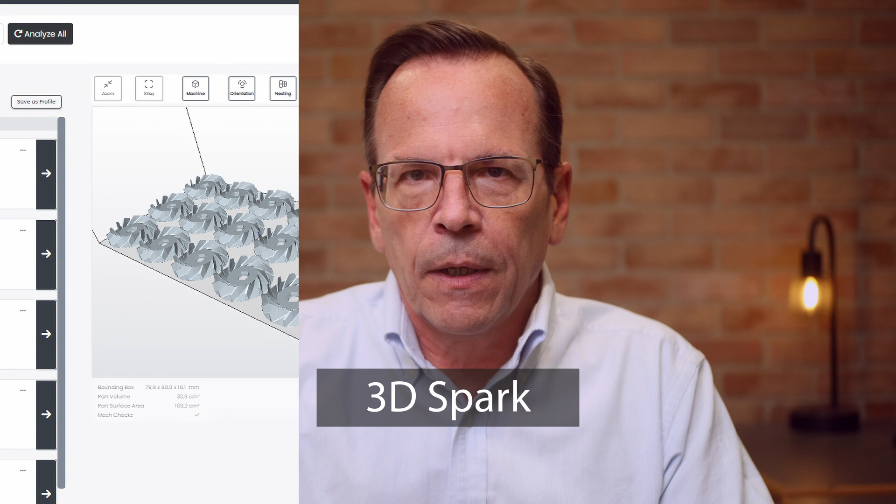In the software category, I'll start with 3D Spark. It offers a decision-making tool that assists in selecting the right process for your parts. Those decisions are based on manufacturability, part cost, time to manufacture, and that's across the full supply chain, and sustainability. What caught my attention is that this isn't just a tool for assessment of additive's applicability. It also produces recommendations for conventional parts. So there's a recommended manufacturing path for every part that's fed to the software.

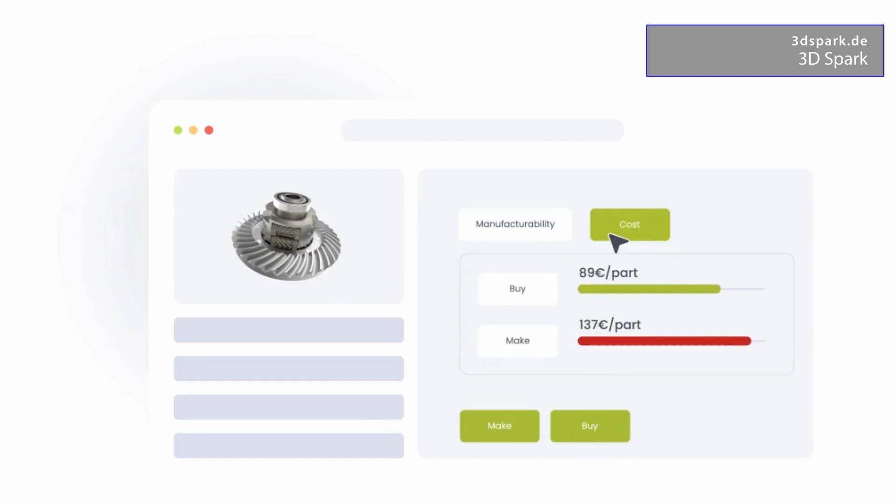Now there's two key pillars to making that happen: an advanced algorithm, and that algorithm is fueled by customer-specific parameters rather than a generic data set. During onboarding of a customer, the data set is populated with the customer's actual data for both additive and conventional processes, which the company states provides very accurate assessments, citing plus or minus 5% variance between actual and estimated part costs. 3D Spark's target markets are large OEMs and service bureaus for automated quoting.

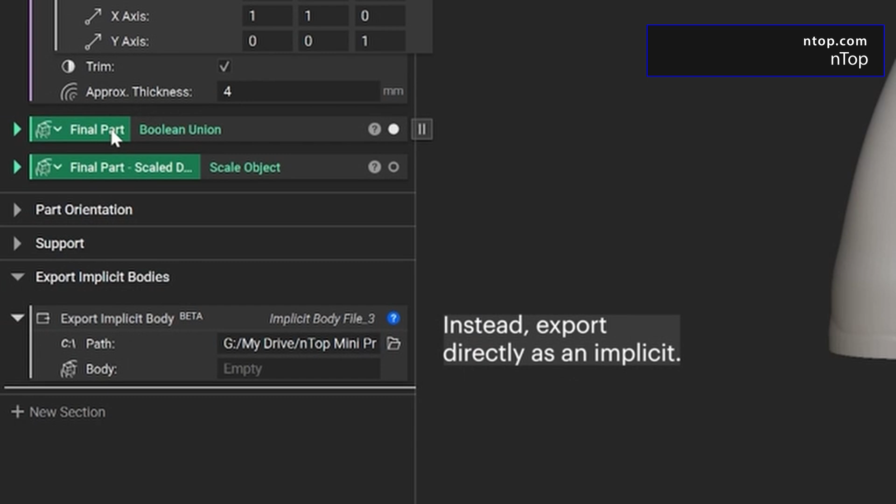nTop announced its nTop 5 software for design, generative design, and topology optimization, offering computational design technology. What's new with version 5 is an implicit modeling kernel for performance and precision combined with an expanded ecosystem within nTop's core developer library that now includes mechanical simulation, computational fluid dynamics, and build preparation tools. That expansion includes 5 new integration partners that can read and query implicit models natively in their software for more efficient end-to-end workflows. Those partners are Autodesk, Materialise, Hexagon, Intact Simulation, and Cloud Fluid.

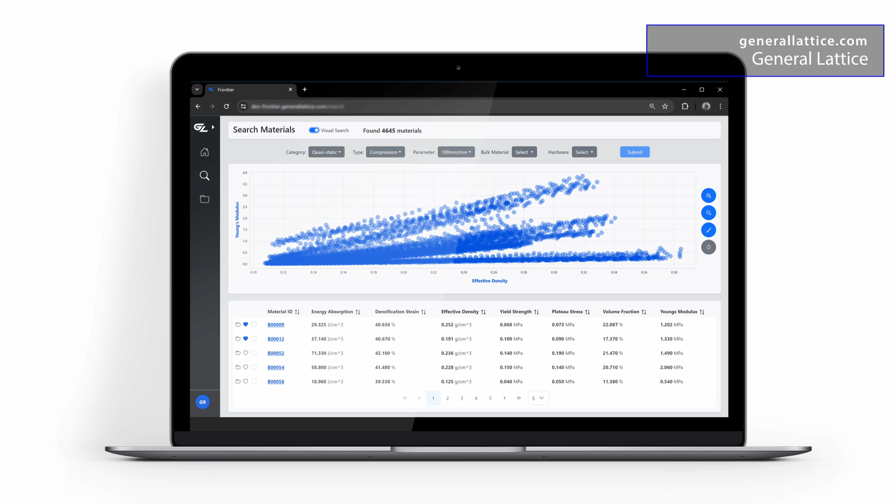Last year, General Lattice announced Frontier and its digital lattice library, which is an archive of materials plus process parameters for various lattice designs, supported by lengthy lists of the associated mechanical properties. Essentially, General Lattice does all of the testing to put you on the fast track with confidence to incorporate lattices in your design. This year, it has launched Frontier Integrations, which allows you to select and apply a desired lattice to your part.

My understanding is that the integrations are limited to those machine and material collaborators for which they have healthy data sets so they can present accurate representations. And that's from companies such as Formlabs, EOS, BASF, and Photocentric. Once the lattice is applied, you can then have it printed through its validated supply chain network. Note that I'm unsure if you can download and print it on your own machines. While robust, this web-based application is affordable, just $120 per month per user.

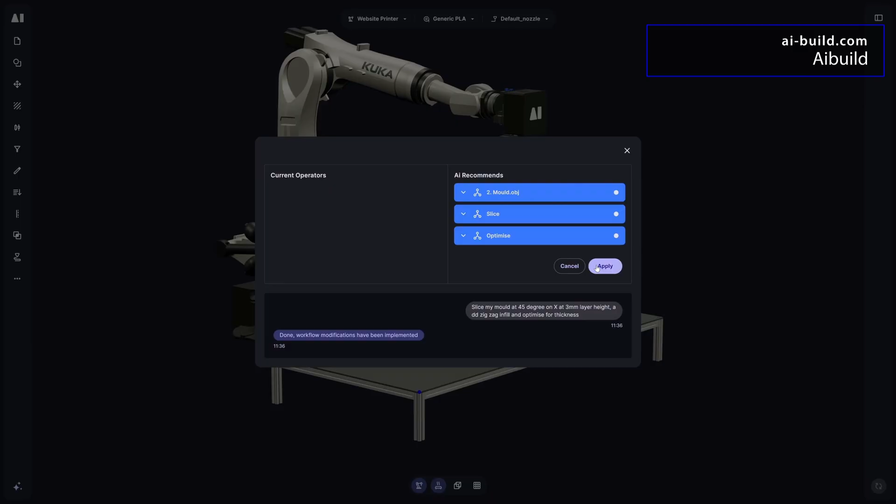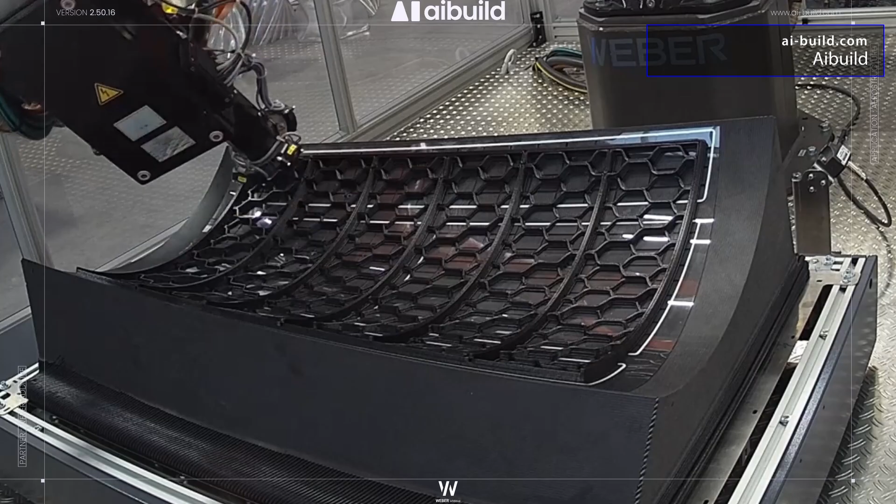Aibuild was demonstrating its new version 2.5 AI solution with an emphasis on the user interface, and it looked quite nice with seamless integration of natural language instructions and visual programming. Where it focuses is on the material extrusion solutions, either fused filament fabrication, FFF, or fused granulate fabrication, FGF, with some DED, for gantry or robot-mounted heads. Its functionality centers on toolpath generation augmented by past print defects and failure information.

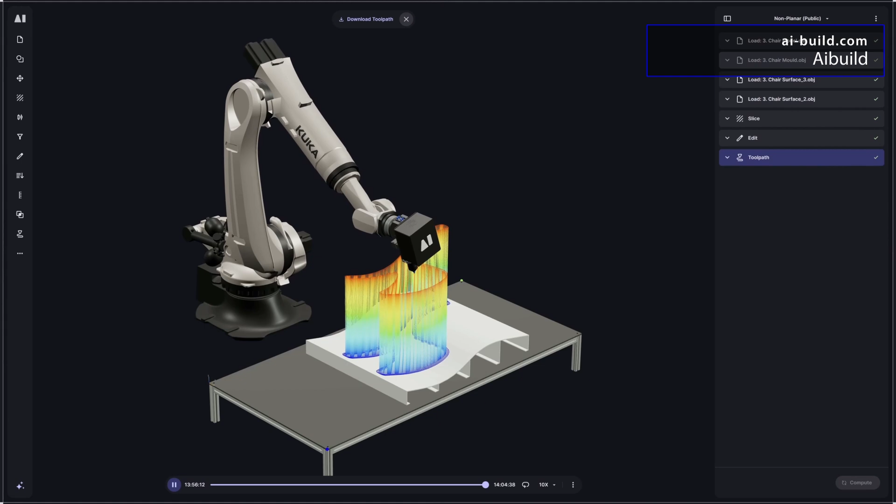The dataset upon which the AI draws is largely populated by Aibuild's partner OEMs, but your real-world results can, or will, enrich that data. While it focuses on FFF, FGF, and DED presently, the vision is to become the singular platform for all additive technologies. What I walked away with was a strong sense that Aibuild's team is comprised of straight shooters and bright minds that have the noble goal of helping the industry grow by removing the pain point of time or failure in setting up prints.

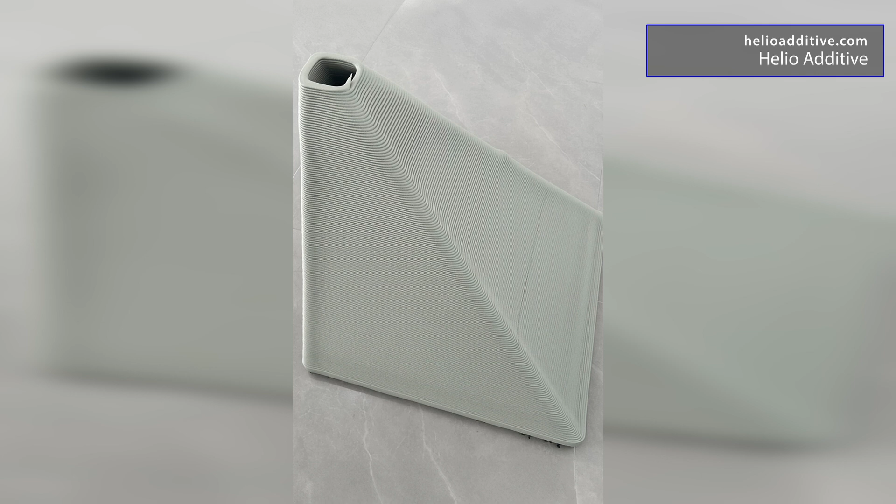In the Polymaker booth, Helio Additive debuted Dragon, which is the result of collaboration between the two companies. Like Aibuild, it is addressing the first time right challenge, but also focuses on improving print times, reducing cost, and improving mechanical properties. To do this, it uses simulation and optimization. Its approach is to analyze and simulate all parameters that are baked into the G-code. Dragon uses an understanding of the physics governing material behavior during printing.

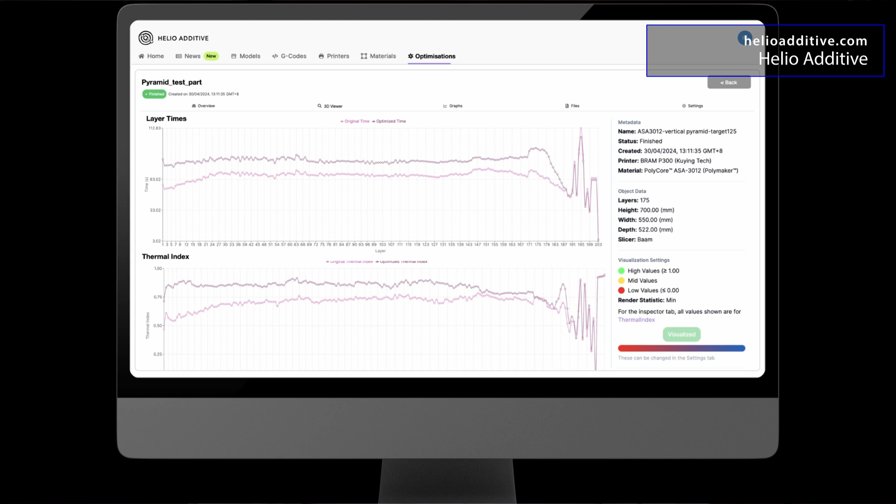The resulting accurate prediction of cooling, layer bonding, and stress relaxation can significantly enhance print quality and reduce defects such as warping. Dragon focuses on large format additive, primarily FFF processes, but it states that it will eventually address smaller format machines and other AM processes. Helio offered a free trial at RAPID TCT, and according to their website, that free trial is still available.

Materialise featured one announcement at RAPID TCT, that's Magics 28, and highlighted a new product called e-Stage for Metal Plus that was announced back in March. Magics 28's key feature is its new Lattice module that supports beam lattices using lighter datasets for faster processing. Additionally, it offers an improved Nester module for automatic optimized part placement.

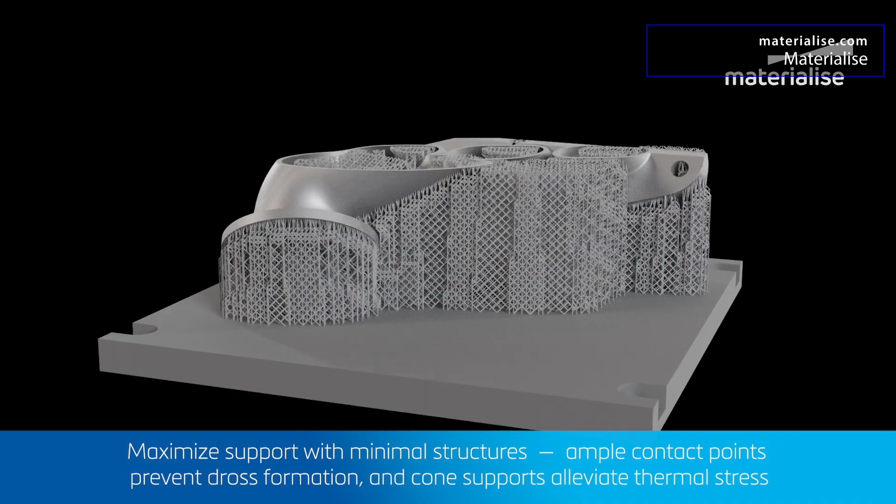Accompanying Magics 28, Materialise announced partnerships with Incus, nTop, and EOS. These partnerships provide improved metal AM success rates for laser powder bed fusion, or LPBF, and streamline the design to manufacturing workflow. Also for LPBF, e-Stage for Metal+ employs physics-based modeling to automate support generation, aiming to streamline metal AM, reduce costs, and minimize complexities.

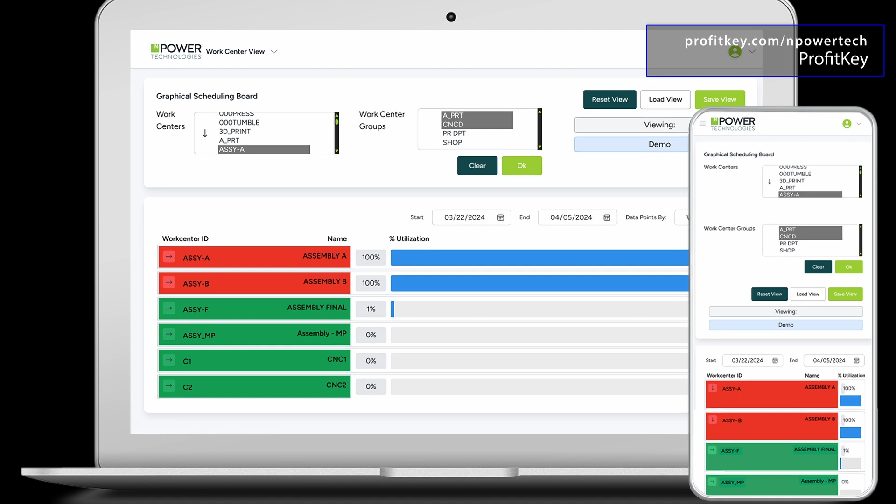ProfitKey featured nPower Scheduler at RAPID TCT. This software is all about scheduling, full stop. It falls into the MES software category, but beyond scheduling, it doesn't offer other functions common in the MES world. nPower Scheduler is a web-based scheduling tool for additive processes that also supports conventional manufacturing operations. It provides concurrent scheduling of materials, work centers, operators, and outside services across the entire shop floor.

nPower Scheduler is ERP agnostic. You can certainly use it with ProfitKey's ERP solution, but you can also use it with ERP from any other company. Its affordable cost model, just $250 per month per controlled asset, and reasonable implementation timeframe of 4 to 6 weeks. That is, if you have your processes well documented and defined before you start the implementation. Those two things make the solution fairly easy to adopt.

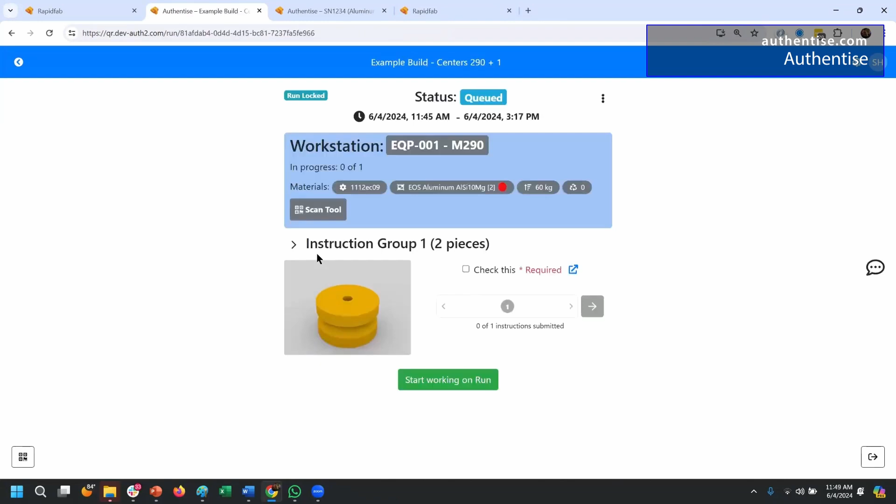Authentise partnered with United Performance Metals to offer the Vendor Managed Inventory Platform, or VMI for short. It leverages Authentise's software technology to offer comprehensive traceability of key components such as metal AM build plates or powders by integrating Authentise's data-driven workflow with UPM's knowledge of high-performance metals and tools. VMI automatically monitors and replenishes stock and features a remote management portal for live monitoring and management. And manufacturers can keep consignment stock in their warehouses. The software is now in beta testing.

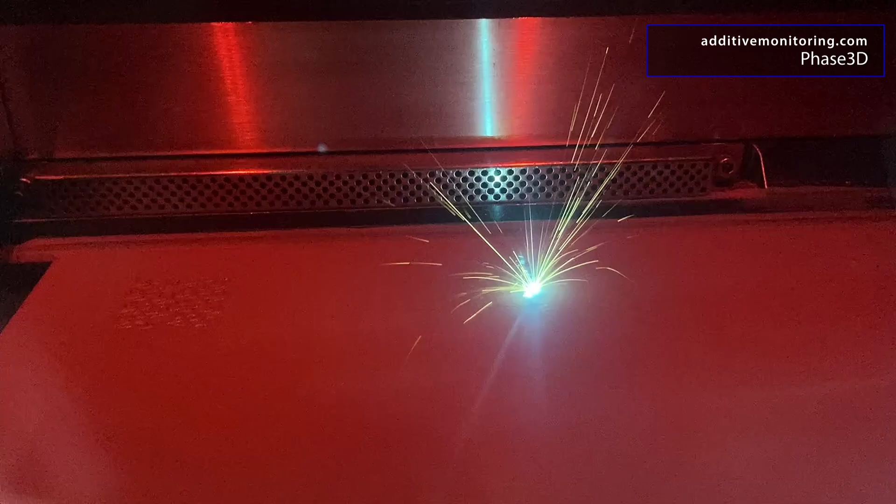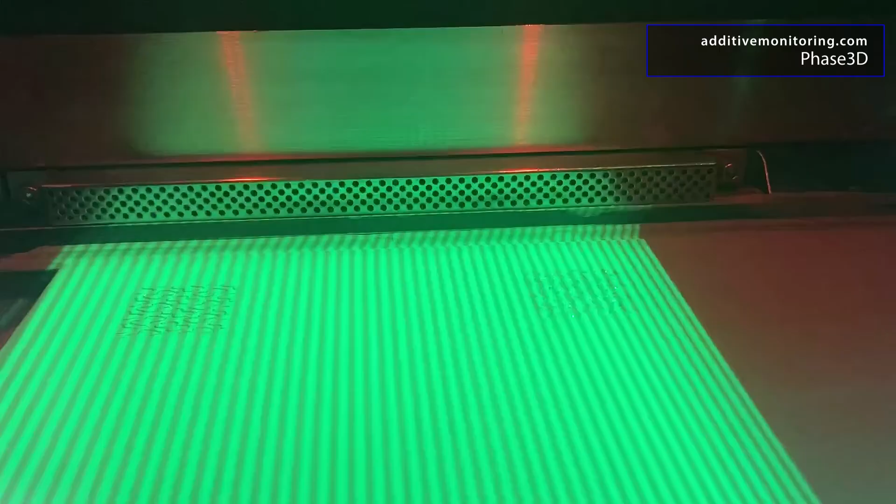Straddling the realms of software and hardware, I have one process inspection tool to mention. Phase3D was on the show floor showing off its in situ inspection. They reject the term monitoring for metal AM builds to detect, measure, and identify anomalies during the build. It does that on each layer without increasing build time by using fringe projection to measure the powder bed at the micron level. The output is a reporting of build anomalies, item by item type, with corresponding measurements, plus height maps and the ability to pick any point on a bed to grab a measurement.

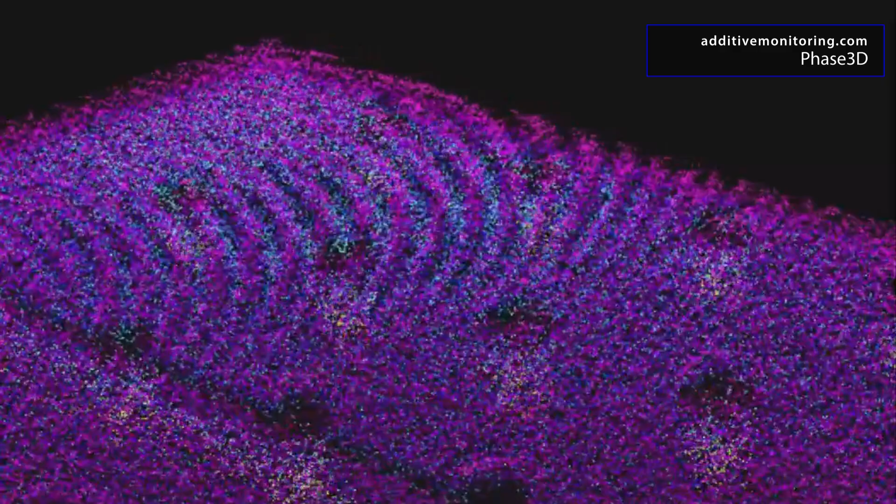Driving home the difference between inspection and monitoring, Phase3D had plenty of examples where camera-based monitoring output yields hard-to-see by eye defects, even if you know that they're present. I've been shown many images, told where to look, and could not spot the problematic area, which showed up in their inspection reporting.

Now, I'll shift to additive machines, starting with polymers. Two new additive players generated quite a lot of buzz on the show floor, the first being Fugo Precision 3D. I reported on them in my pre-event video for Who's New, but I had many questions at the time. After in-depth conversations on the floor, I've wrapped my head around what they are doing and why that matters. The process is called centrifugal 3D printing, and its first machine is called Model A.

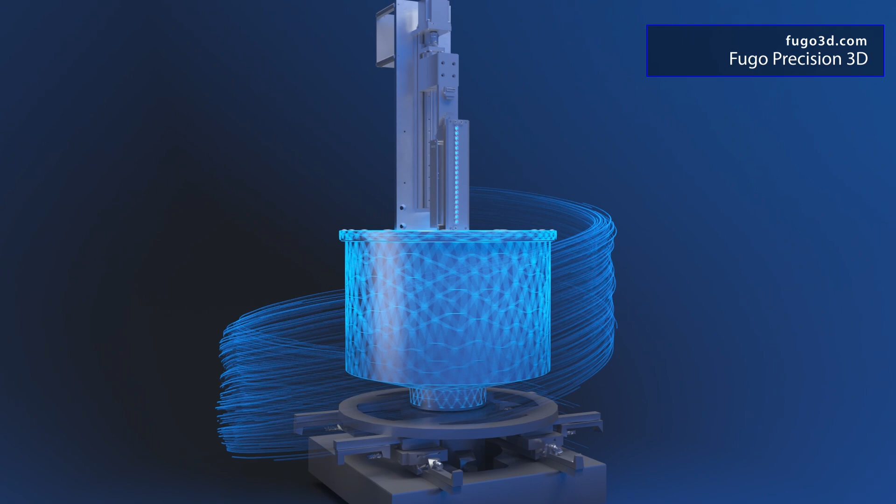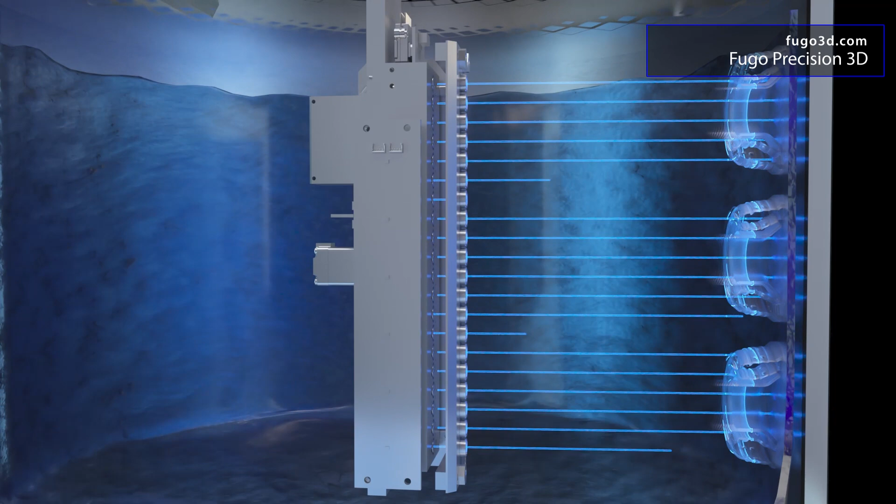The way it works is that a drum spins at 3,000 RPM. Within that drum, a sheet of metal is placed along the inner diameter. This becomes the build plate. From the bottom, photopolymer is injected into the drum, dosed such that the resin coats the build sheet to the desired slice thickness. And from the top, an array of lasers enters the drum, and it stays there until the build is complete. As the drum spins, those lasers fire to cure the resin.

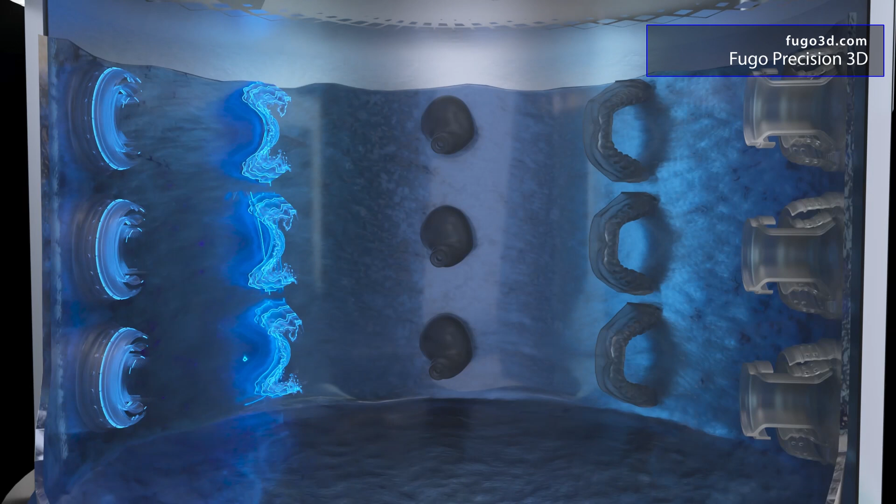Now, this is a very unique approach to additive with many advantages, including the speed is impressive. Less than 1 hour per vertical inch of part, where vertical is actually the axial dimension in the machine. There are virtually no support structures needed because at 3,000 RPM, the resin is pulling 2,100 Gs, which makes it behave like a solid. After the build, the uncured resin simply drains to the bottom for recovery and reuse. The process is not bound by the usual limits on photopolymer viscosity, and it can be used with filled materials. Also, there's no mechanical moving parts that can wear or fail.

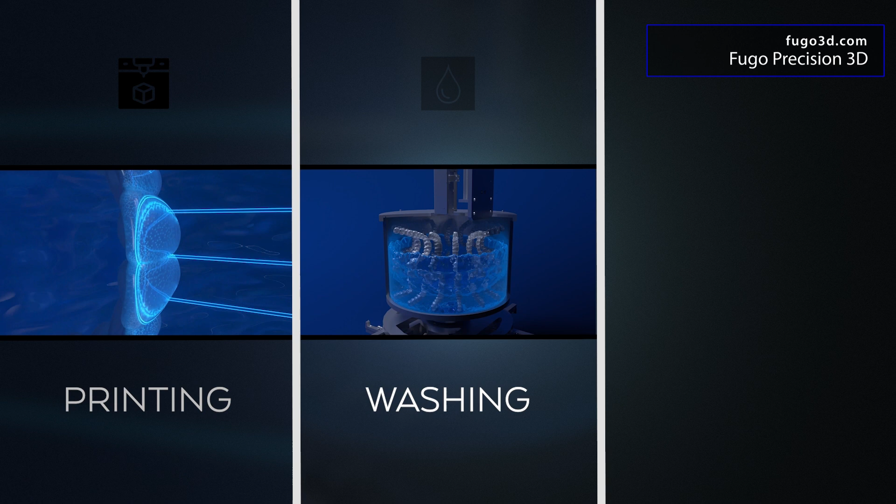Optionally, the Model A can output fully cured parts. To do this, the uncured resin is extracted, a washing solution fills the drum, which is then agitated like a washing machine. The solution is pumped out, and LED bulbs flood the drum with UV light.

The next three announcements are all in the material extrusion category, and they point to a welcome trend of addressing customers' true needs rather than playing follow the leader with me-too products or innovating in hopes that there is a need. With the announcements by 3D Systems, BigRep, and Roboze, we see platforms that are right-sized with attention to speed, reliability, efficiency, and quality.

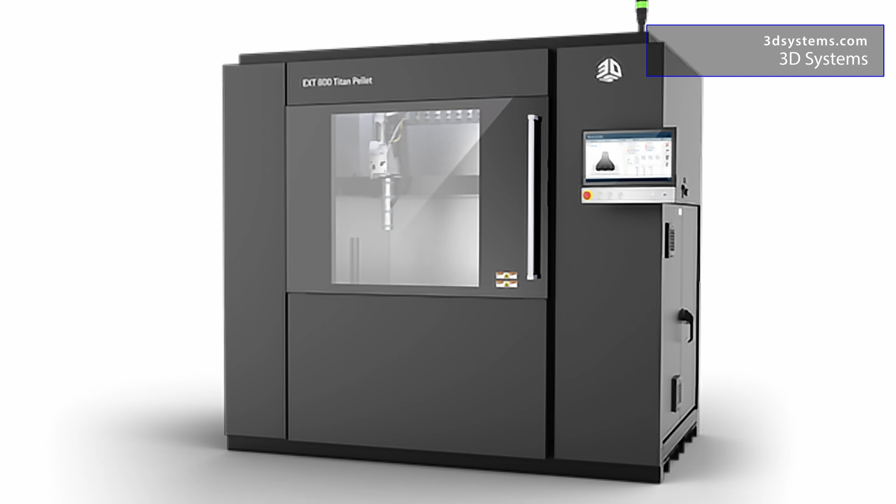3D Systems launched the Titan EXT 800, which has an 800 by 600 millimeter build area that's smaller than its 1070 and 1270. This fused granulate fabrication machine, a pellet extruder, boasts a smaller footprint and lower upfront cost to make it easier to adopt and implement. Using components like industrial CNC controllers, 3D Systems states that the EXT 800 delivers speed, reliability, and efficiency.

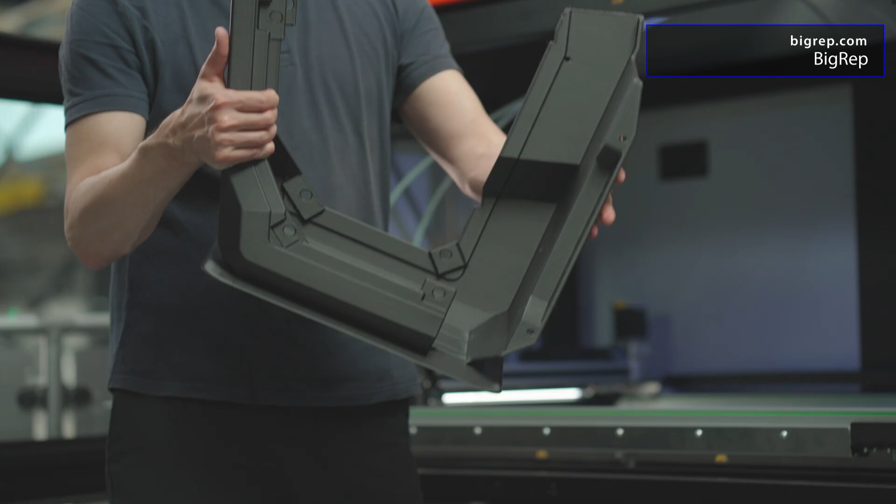BigRep announced its new VIIO 150, which is an FFF machine with a build area of 1 meter by 1/2 meter. This machine is smaller than others in its lineup because the company has found that this size falls in the sweet spot of user needs.

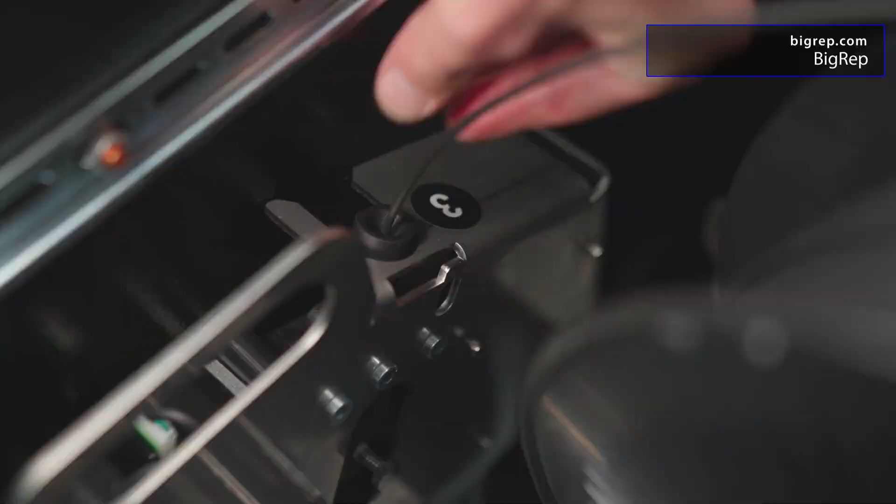VIIO 250 is claimed to offer automated, effortless printing, or as one representative stated, an approach that eliminates common operator mistakes. There are a number of capabilities that play to this intent, including automatic bed leveling to get the first layer right, failed print detection, recognizing plugged extruders, and a controlled environment, 50 degrees C build chamber and 120 degrees C bed temperature.

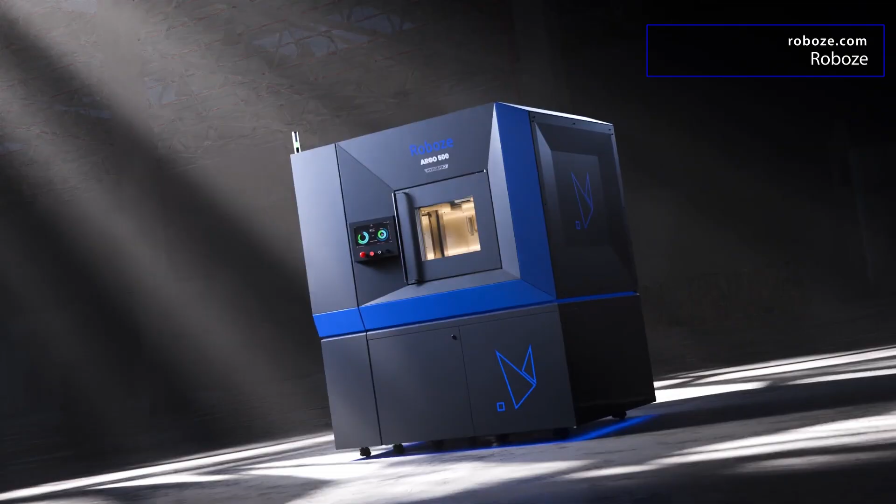Another new FFF machine is Roboze's Argo 500 Hyperspeed. This is an upgraded version of the Argo 500 that's claimed to increase speed, efficiency, and quality. It does that with upgrades to the material deposition flow and to the software. It's outfitted with PolyFlow X for fast, controlled flow, yielding up to 62% faster prints, and it has smart G-code print algorithms to optimize movements and travel for up to 92% print time reduction when used with dual extruders. Argo 500 Hyperspeed has a 500 by 500 millimeter build area and a heated build chamber, up to 180 degrees C.

The last bit of polymer news is for those in the medical field. Stratasys announced the J5 Digital Anatomy. It's an entry-level extension of its existing PolyJet digital anatomy capabilities that are for medical modeling of lifelike, patient-specific structures that behave like human tissue, skeletal structures, and vasculature.

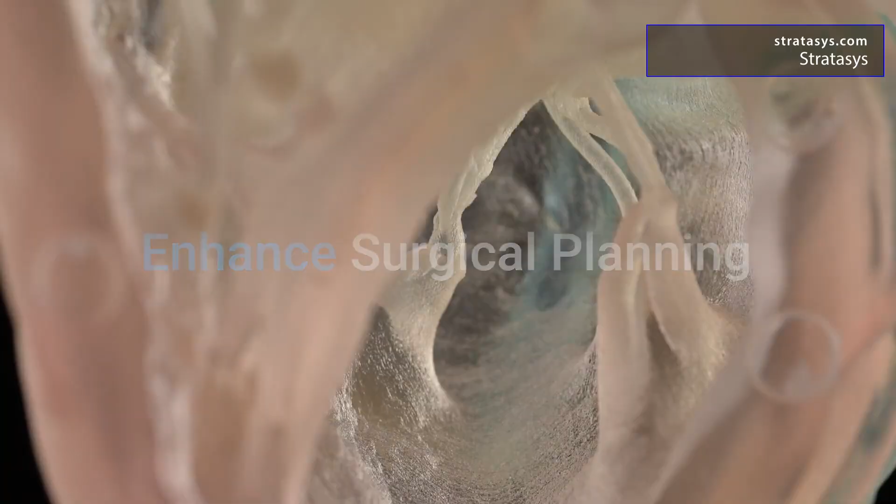The price and size of the J5 Digital Anatomy expands access to the medical modeling tools within hospitals and medical device manufacturers and facilities and research institutions. The key benefits target enhanced surgical planning, interactive training, and accelerated development of medical devices.

Before I shift to metal additive machines, I have one composite printer solution for you, and it plays to another trend, using the established expertise, technology, and architecture of non-additive solutions. In the case of Impossible Objects, that means leveraging the best from high-speed 2D printing. It announced that it's now shipping the CBAM 25, which combines fiber cloth and polymer to manufacture composite parts. The 25 in the machine's name is a reference to its throughput, 25 feet per minute.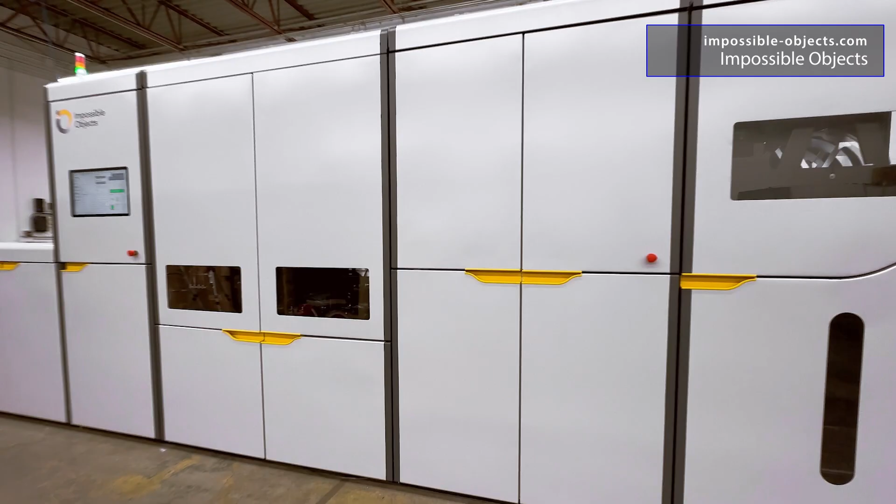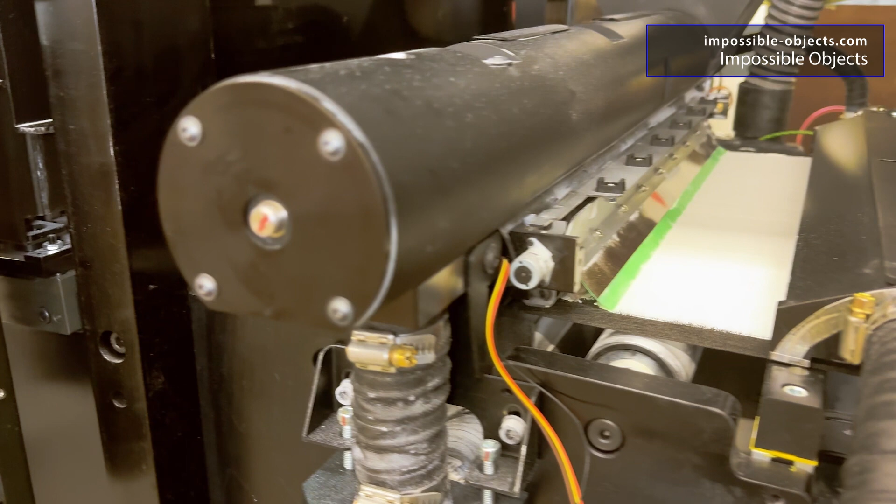To get an appreciation of where that speed comes from, let me explain how the process works. It starts with a roll of fiber material that's fed into the machine. First stage is a jetting bar depositing a solution in the pattern of the parts on that layer. That then passes underneath a deposition bar where polymer powder is just flooded over the surface. Wherever the ink was in the jetting process, that powder sticks. Then it passes under a vacuum unit to suck away the undesired material.

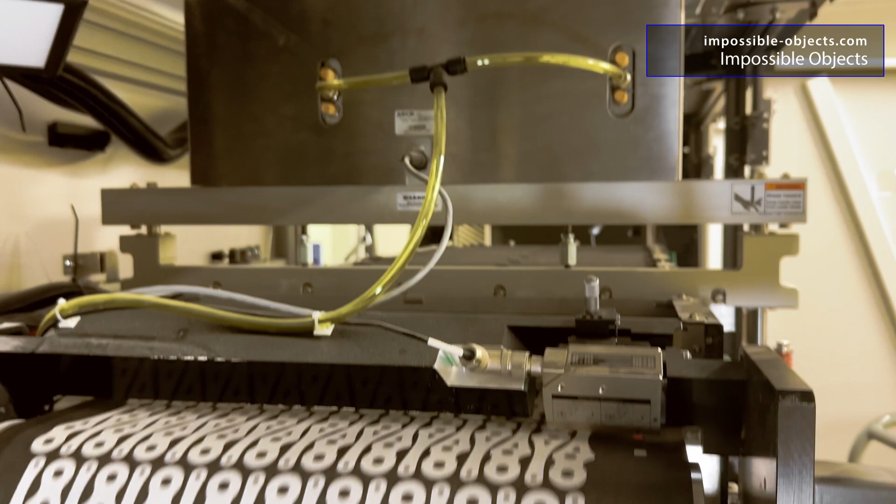That then comes out of the machine as cut sheets, which are then stacked. The final step is outside of the machine. This is consolidation, where heat and pressure are applied. There's a lot that this machine has to offer, but two features stand out in my mind. One, it uses vision systems to ensure proper alignment. And if errors are detected, it can recover by reprinting the bad sheets. And two, there's no heating during printing, so parts can be tightly packed without concern for thermal bleed affecting part quality.

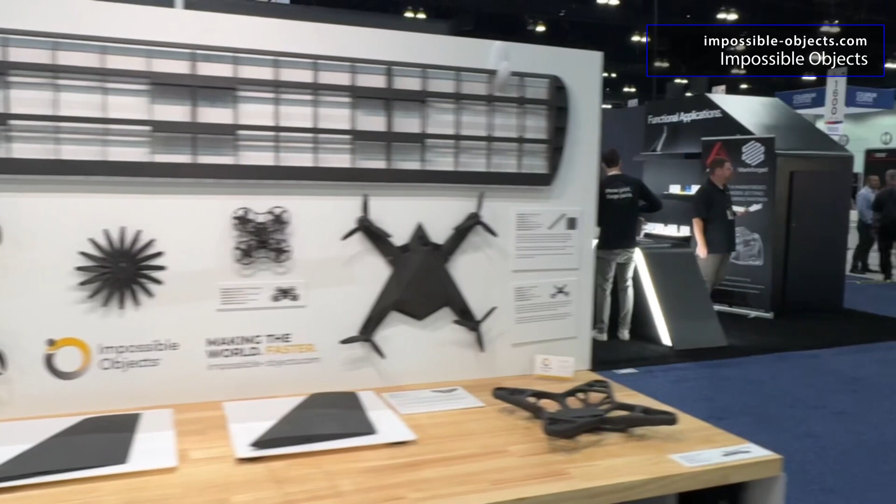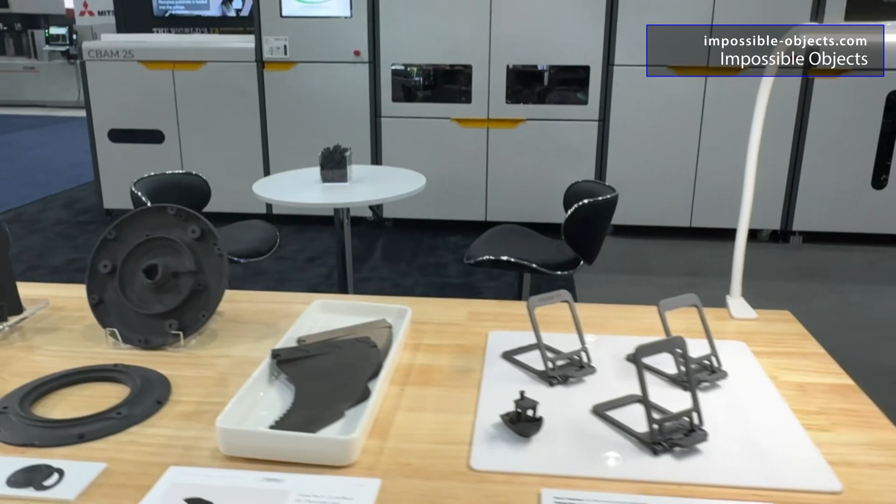Impossible Objects is targeting production work, and it has data showing that it's competitive with 6061 aluminum and conventional carbon fiber composite layups. For example, the cost per part is well below the current threshold established by aerospace industry and DoD specs. And for part strength, it showed that CBAM 25 can match that of 6061 aluminum while producing a part that weighs 50% less.

The last three items I will highlight are in metal additive. Like Fugo Precision 3D, Grid Logic had the show floor buzzing about its unique approach to 3D printing, something that they loosely call multi-material 3D powder printing technology. For many metal AM parts, HIPing, or hot isostatic pressing, is part of the workflow. For Grid Logic, it is part of the process.

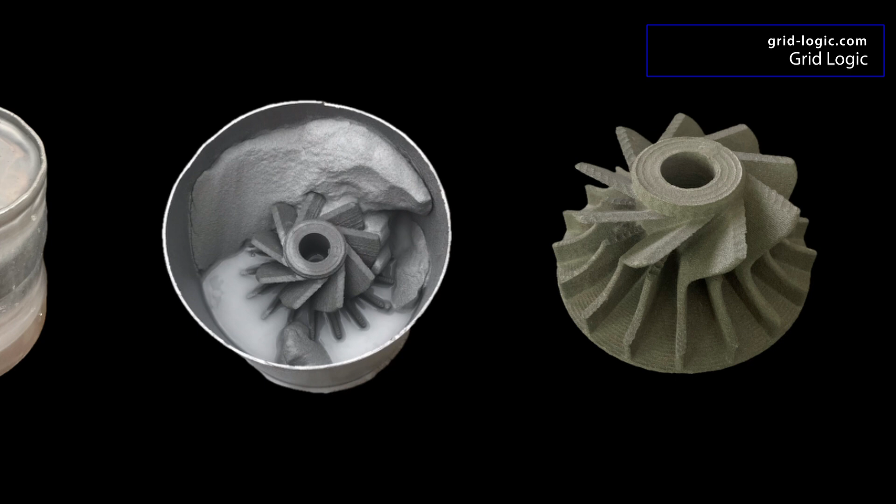Its process dispenses metal or ceramic powders directly into a HIP-suitable can. No sintering, no binding, no melting. When the process is complete, the can is sealed and sent to the HIPing operation, where the material is consolidated into a dense, layerless, near-net shaped part, or parts in one build. And the standout highlight is exceptional diffusion bonds between dissimilar materials.

Grid Logic is targeting high-value parts with multi-material needs. Its system deposits zircon, which acts as the supporting or surrounding material, and up to 5 metal or ceramic powders. But note that it's not selling machines. Instead, it offers part manufacturing services that fold in the R&D for your combination of part design, desired materials, and desired performance.

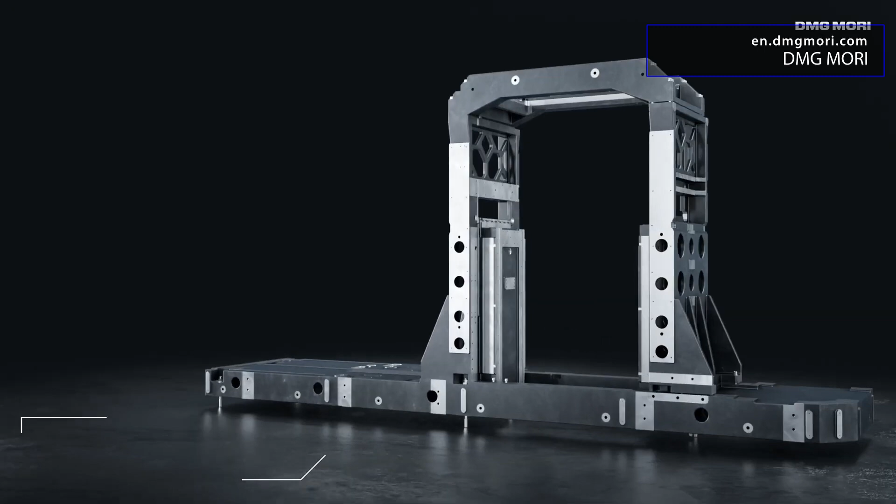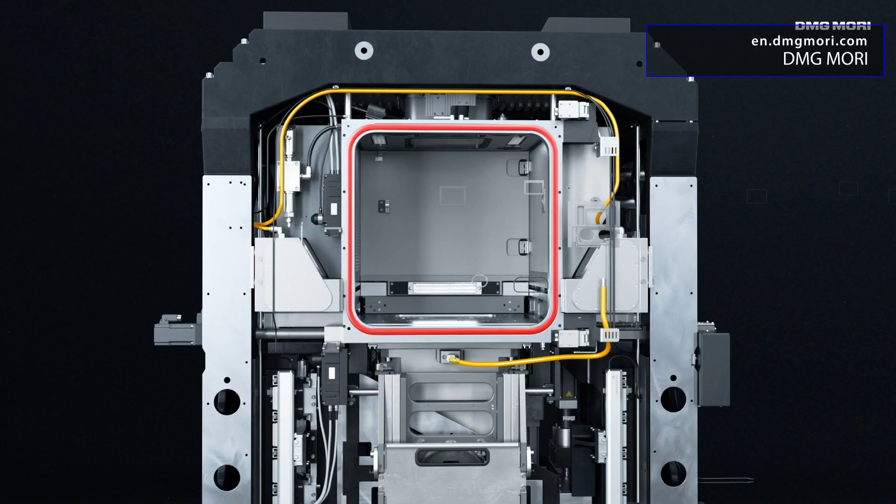In laser powder bed fusion, DMG MORI announced the LASERTEC 30 SLM 3rd Gen. This machine expands the number of lasers, now up to 4, with full overlap between them, and includes bidirectional recoating with collision protection. The machine offers a number of improvements for performance and efficiency, including a rigid core structure that's standard for its machine tools, compensation for temperature changes as the powder bed absorbs the laser's energy using its floating process chamber that can expand in all directions, and a new rapid build chamber exchange that employs internal covers put in place so that the machine's inert environment is preserved.

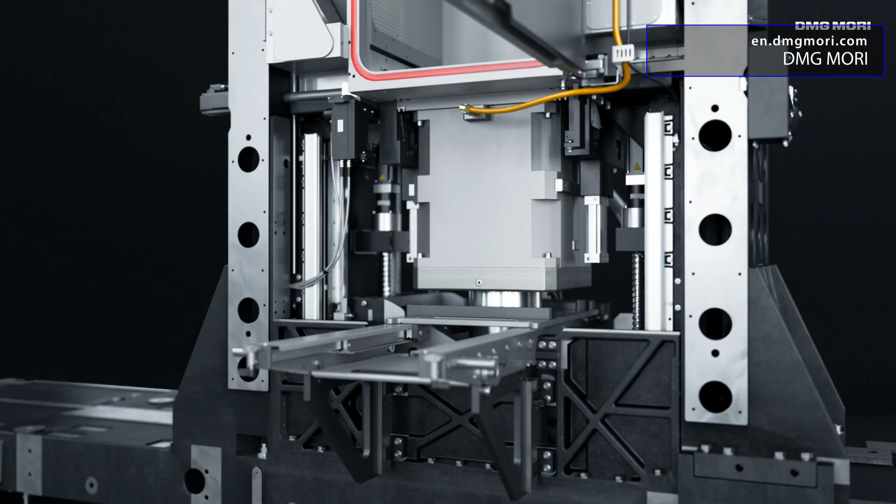Plus, the LASERTEC 30 SLM 3rd Gen has a number of advancements that aren't awe-inspiring, but are fundamental to efficient, repeatable, and reliable operation.

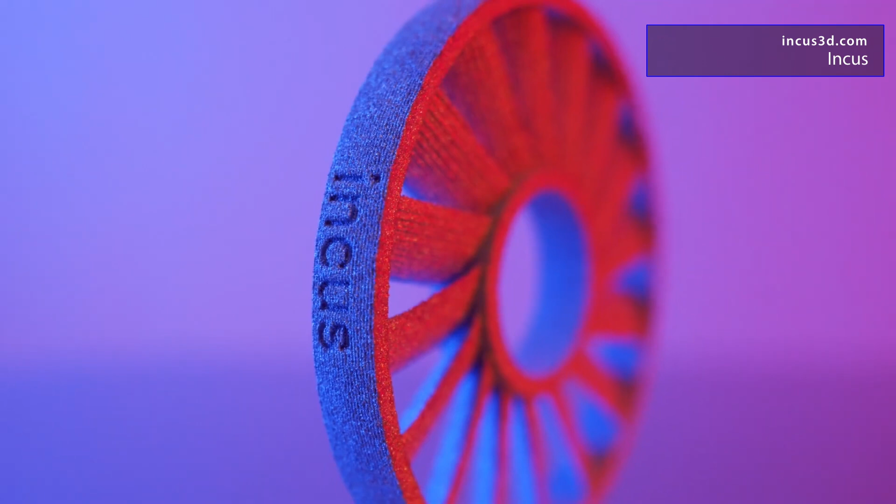For those looking for smaller metal parts, approximately 5 to 50 millimeters being the sweet spot, Incus now offers its Hammer Pro 40. This machine offers high resolution and good surface finish. With this combination of size and quality, the company currently focuses on medical and dental parts, such as surgical tools and orthodontic brackets.

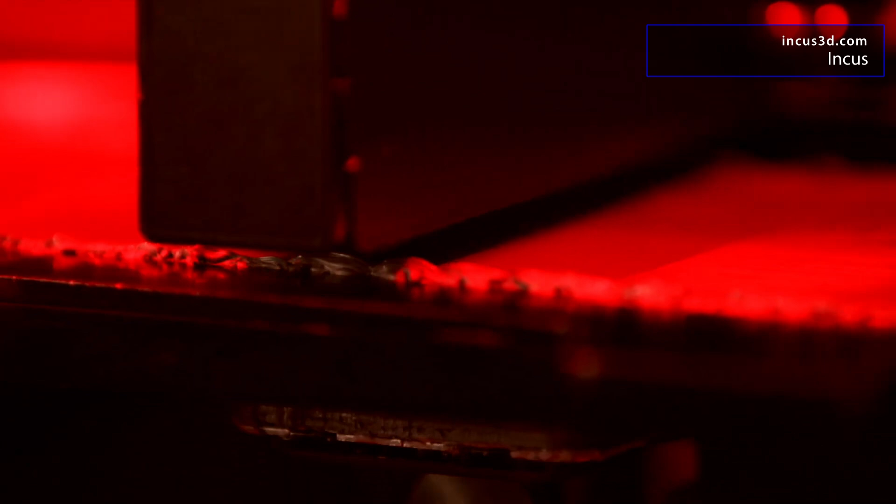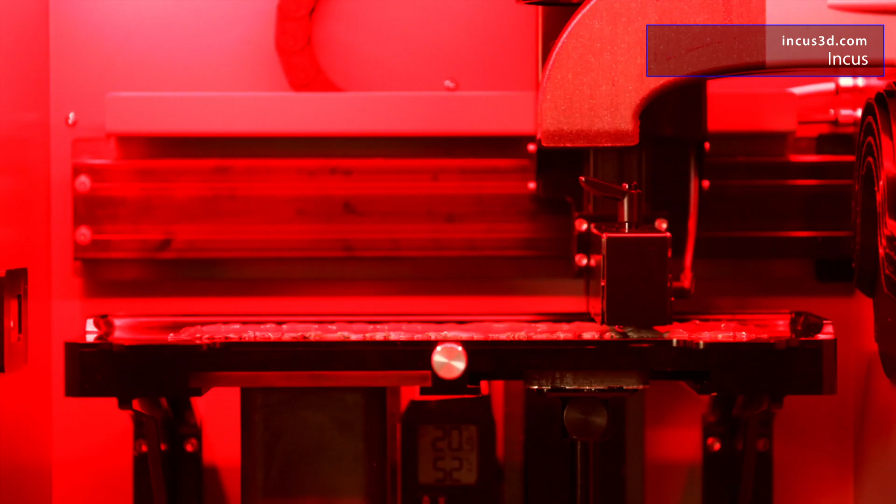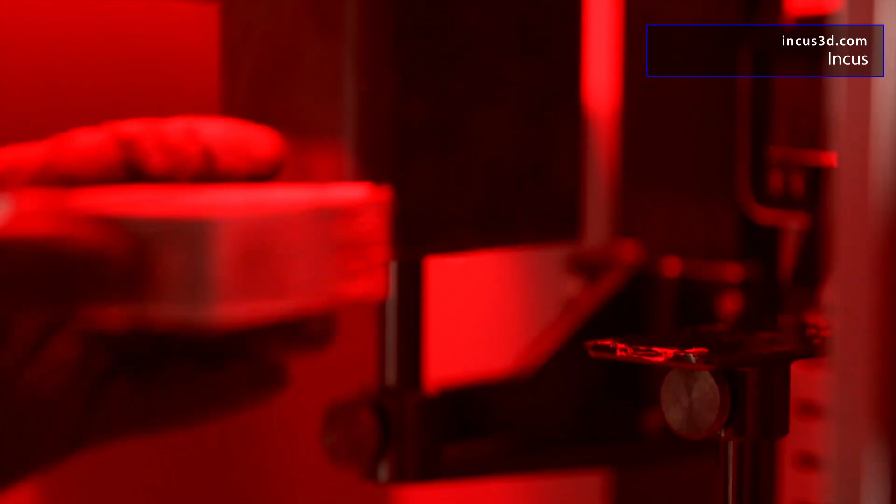Let me take a few seconds to explain how the process works. Its feedstock is a solid block that combines photopolymer and metal powder. Now, it's solid at room temperature, but if you apply a little bit of heat, it softens or melts. So within the machine, that block is heated to 45 degrees C so that the material can be spread into the build area. Once spread, it rapidly solidifies. Next, they expose the desired area to UV light to cure the photopolymer, which then binds the metal powder.

In the machine, they then extract the green part, which means they remove all of the uncured combination of photopolymer and metal powder. Once the green part comes out of the machine, it's then off to debind and sinter. Incus stressed that this is a simple process and powder-free. There's a wide range of alloys supported, and Incus states that if the alloy is supported in traditional metal injection molding, or MIM, it can be used with the Hammer Pro 40.

That is a lot of new product information to digest, but there was plenty of other news from the RAPID TCT show floor that I did not get to see. To reinforce how much activity there was, I'll briefly recap some of the news that came out of the event. In metals, SPEE3D announced TitanSPEE3D, its largest cold spray 3D printer, and a new material, nickel aluminum bronze, for marine applications or where corrosion resistance is needed.

EOS announced its planned integration of nLight's beam shaping lasers onto its 3D printers and the new M290-2 with two 400-watt lasers. Colibrium Additive, formerly GE Additive, made an addition to its EBM lineup, the Spectra M, where M stands for medium size. HP had several announcements, including a build height increase for metal jet, new materials, a new texture library, and metal jet production services.